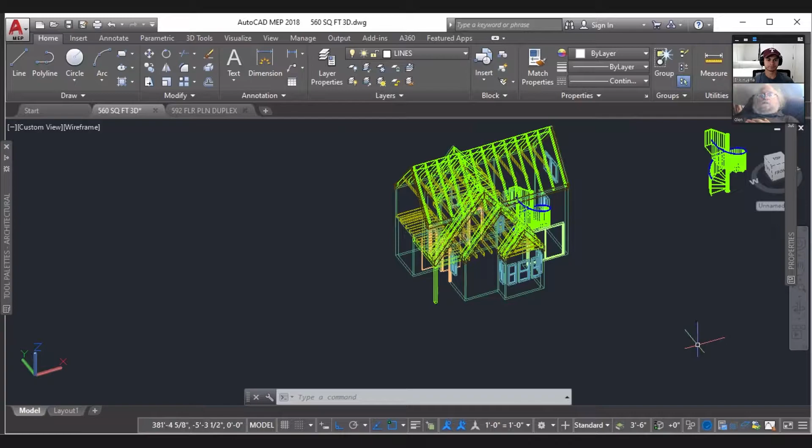Eric, I got some feedback about our tiny house that we were working on the other day, and the only feedback I got was negative, and it was basically saying, "How could anybody live in a place that tiny? Probably couldn't." And so I took their advice, and I decided that our little ladder getting up into the loft area had to go, and I made a spiral stair, and I added a little alcove out here that takes you out to a sliding glass door that lets you out into the side yard, into the backyard here.

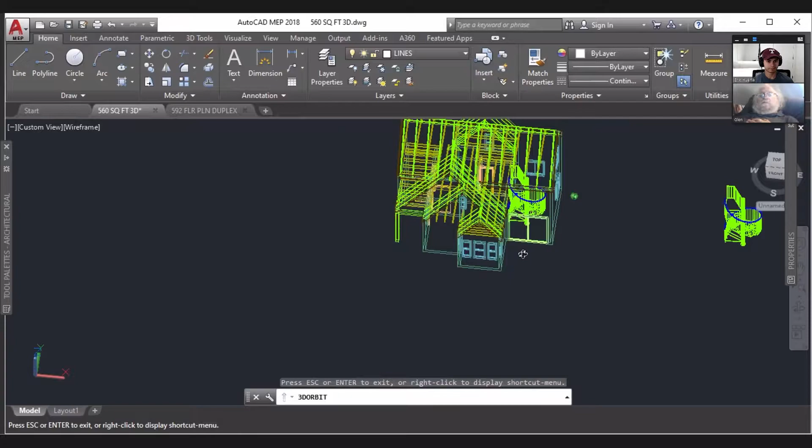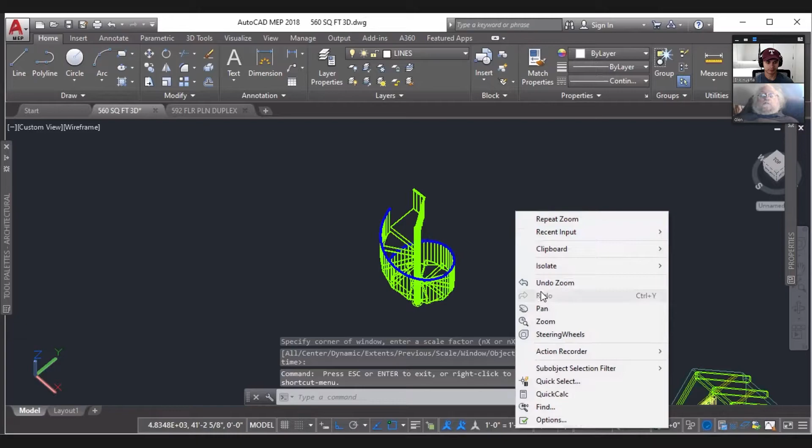And then it's got a spiral staircase that takes you up to an expanded upstairs area. It's not huge. The whole thing is still less than 600 square feet, but as you can see, I've separated the spiral stair here. Let me zoom in here. I also switched it around so it went in the other direction. And the reason for that is that it gives you an option for a little computer desk over here, a little place where you could potentially hang out and have like a little mini office. Still a tiny house, but bigger than it was.

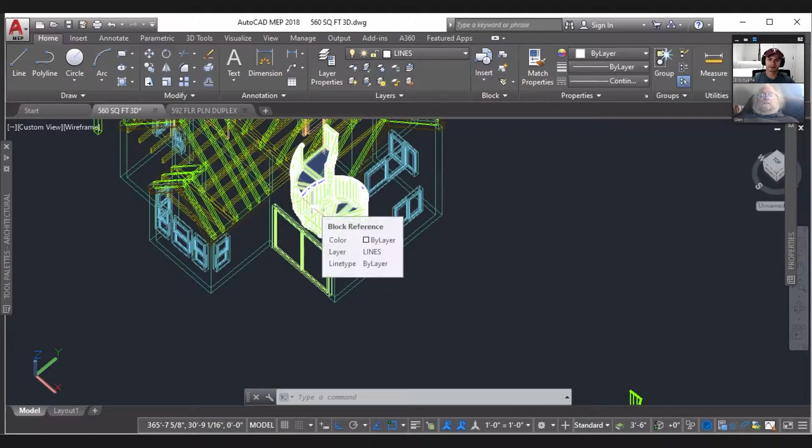Okay, so you basically took the spiral staircase out of the main floor area and gave it its own little section. No, I took the loft ladder out that was over here, and I replaced it with a spiral staircase here. See it? Yeah. Let me share this other screen with you here. There it is. All right.

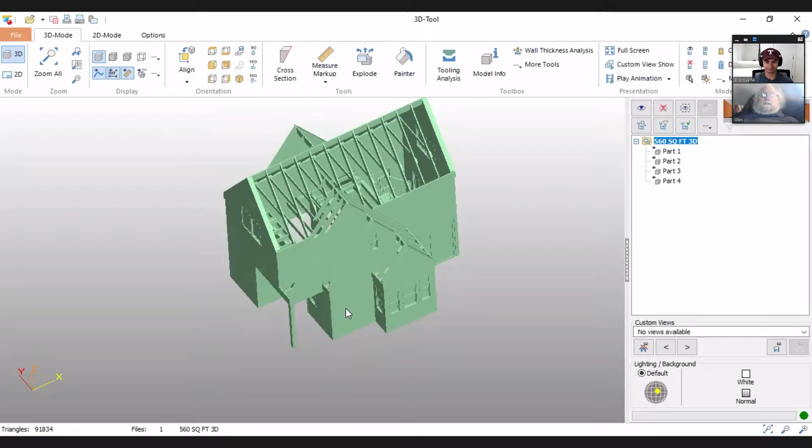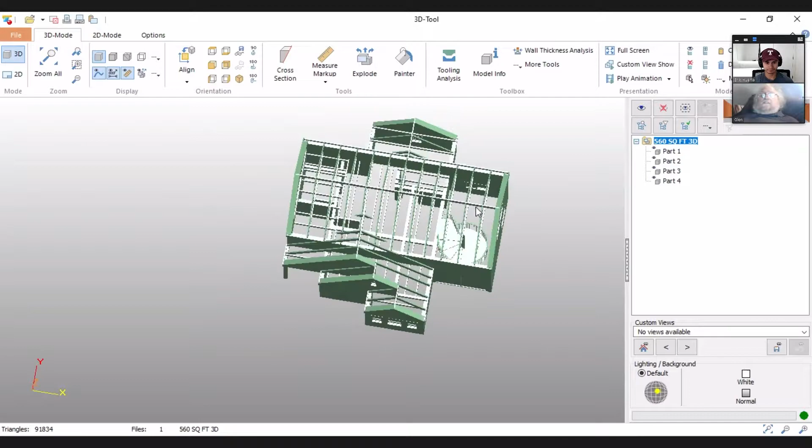Okay, so basically, this is the rendered view of it, and here's your front door, just like it was before, except that it's now got this area expanded a little bit, and instead of that loft ladder, you got a spiral stair. And the spiral stair takes up about half the space of this little expanded alcove here, and it leaves you a little office area in here, someplace where you could put a little computer desk. Anyway, that was in response to the criticisms that we got, and I should pull up this.

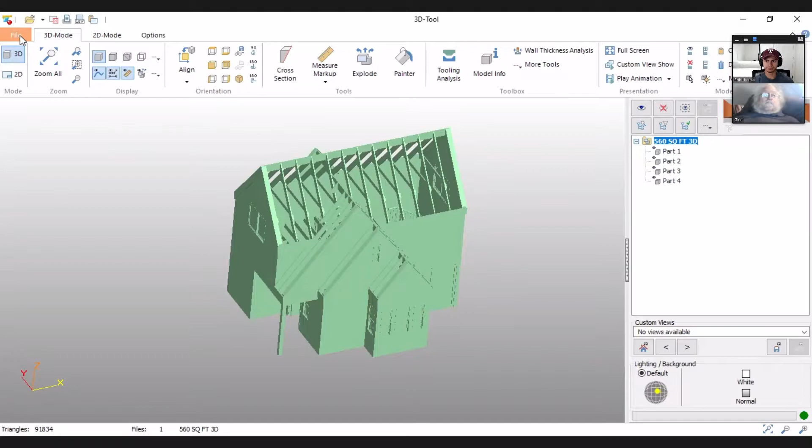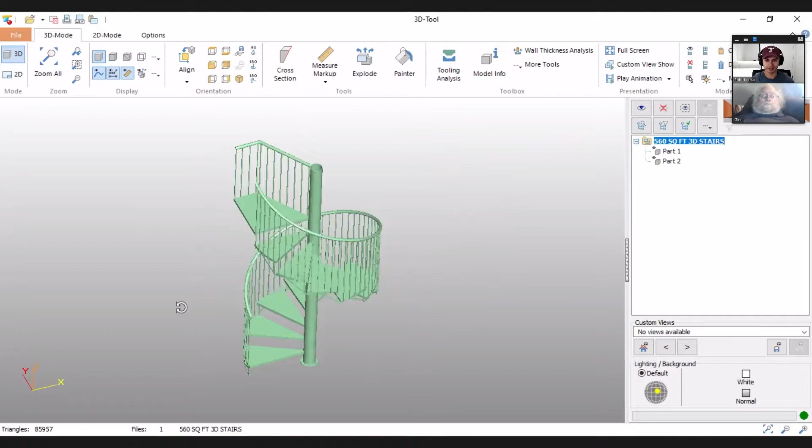And while you're pulling that up, there's options to make larger homes. Obviously, that would increase the cost of production. But a lot of people just use them as little weekend vacation homes to rent out, maybe for 2 to 3 people, only for a few days. So depending on usage would also determine the size. Oh yeah, I mean these things aren't something that a normal person's going to want to live in full time, but for a cabin somewhere. Right.

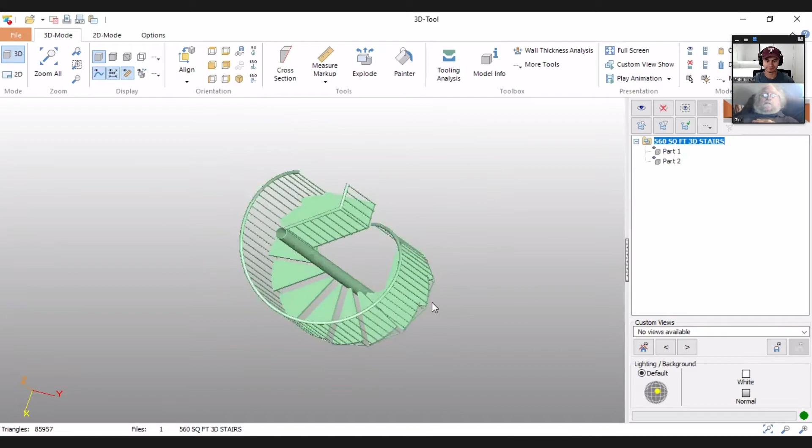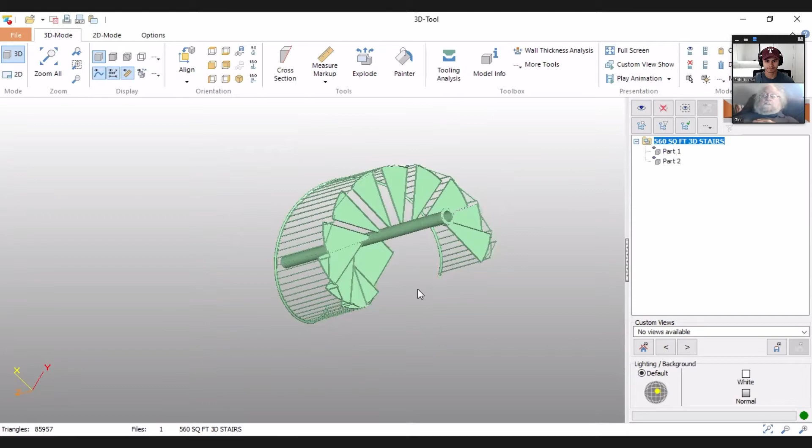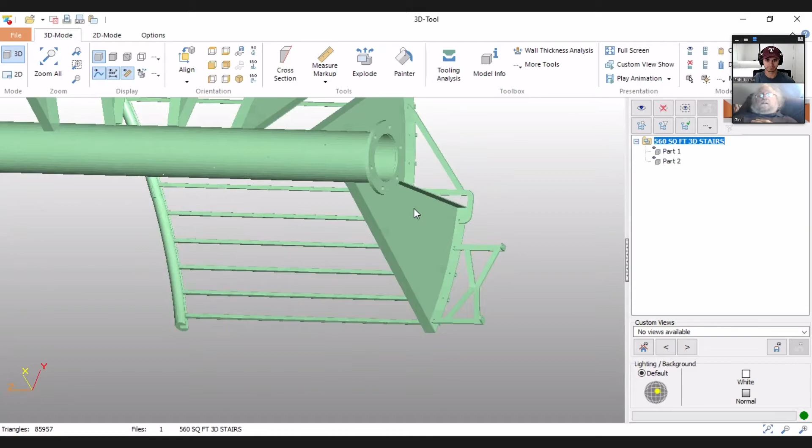Anyway, there's your spiral staircase, and the thing about this is that you can make it yourself. I'm going to zoom in here and show you an upside down view of it, so that you can get an idea of what the thing consists of, and you can 3D print your own handrail. The only difficult part about this stair is the handrail. And if you have your own 3D printer, you can print it. You can see where I started out with a little brace on the bottom that holds the bottom pan. This is just a sheet metal pan that you can make up. And then each one of these pans is connected to the next pan up with a brace here.

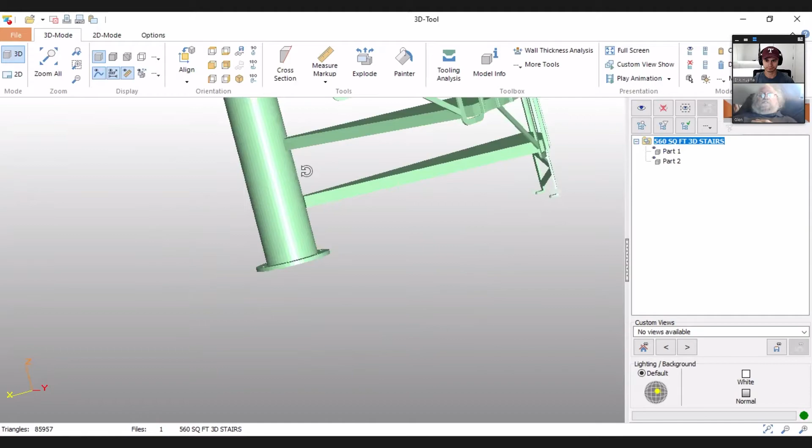And then each of these is done with a segment. It's a pipe segment. And of course, the segments in this case are 8 inches because that's what it took me to get from point A to point B. Let me show you just the single handrail assembly. Okay, this is just the handrail assembly. That's the segment of pipe. See? And then what you have is an external pipe, and that bolts to your pan. And then you have another pipe that slides in the middle, down through the bottom of that, and then you grout the whole thing.

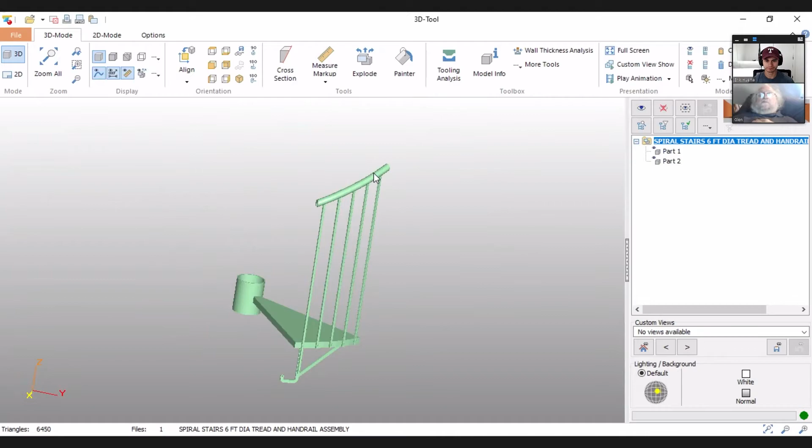And then this handrail had to be 3D printed in 3 different sections. And I gave you those the last time I saw you. Yeah, I have them. I think I'll take some pictures and throw them in here so people could see what we're talking about. I have it right here. I glued. So this is the... Yeah, there you go. There it is. I was able to glue 2 of the sections together, and I left this one separate just so people could see. That was the center. Oh, okay, the little one was the center.

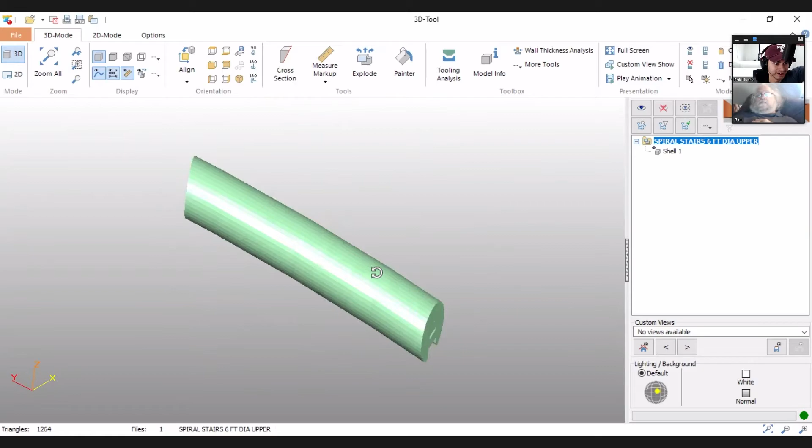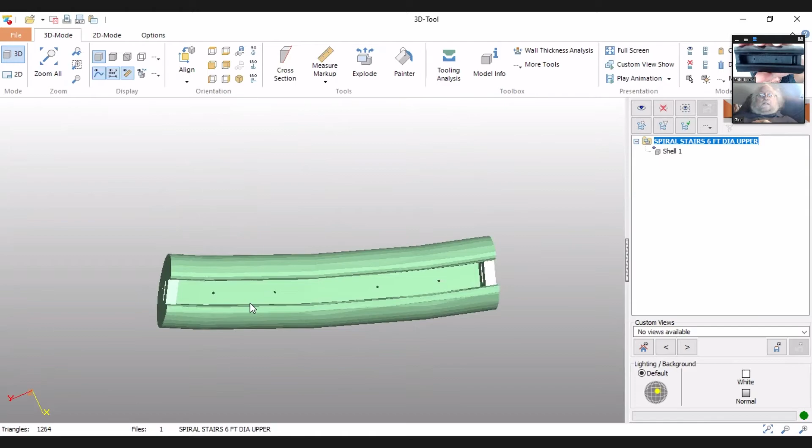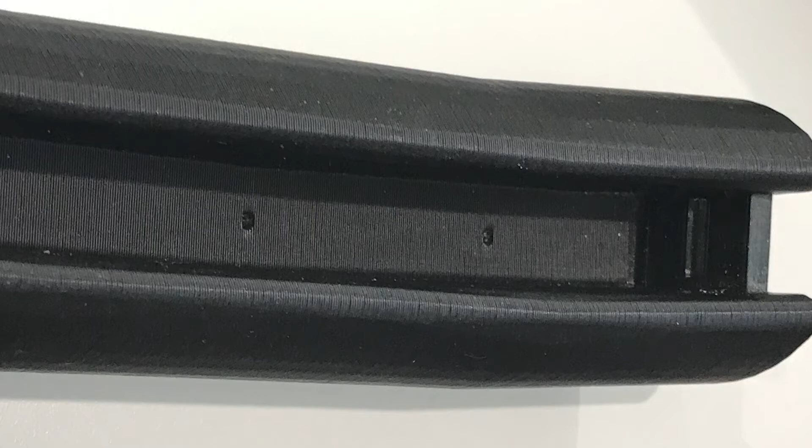Well, I glued them so I could take them apart, but I see that you put some slots in here. Yeah, you see, and then not only that, but there's holes in the bottom of this. Let me zoom in here. You see the holes in the bottom? Right. These holes are 3D printed in place, and they're designed to accept screws, and they're evenly spaced so that your balustrades, the little angle bracket on either side that supports that balustrade, screws right into that. The screw screws right into these holes.

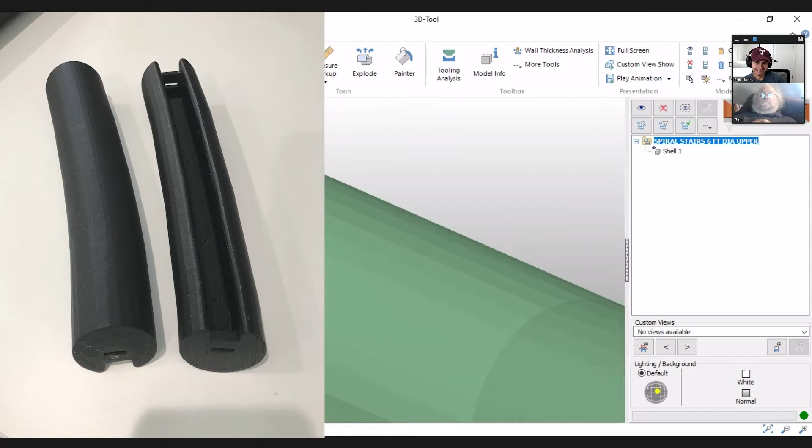So you can download this from our website, and you can make your own handrail for this particular stairwell. In fact, we'll put the whole stair up there. We'll let you download the whole stair for free. Nice. I knew I should have asked about the handrail. I knew I was going to mess it up. Well.

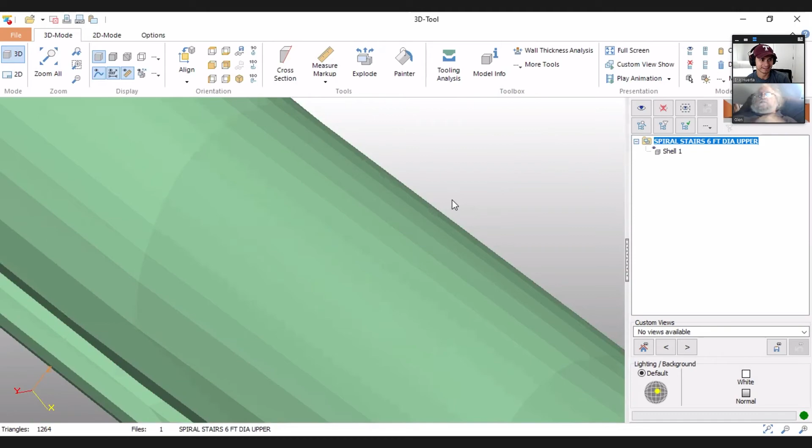Anyway. So how do you use these slots? How do you connect them together? I mean, I used hot glue just for... Yeah, that was just made for a zip tie to hold it together long enough for the glue to set up. Okay. All right, well, we'll throw this up on the site if anyone wants to print them. And then after you print them, are you able to finish them or touch them up with anything? Just out of curiosity. Yeah, you can do whatever you want with it.

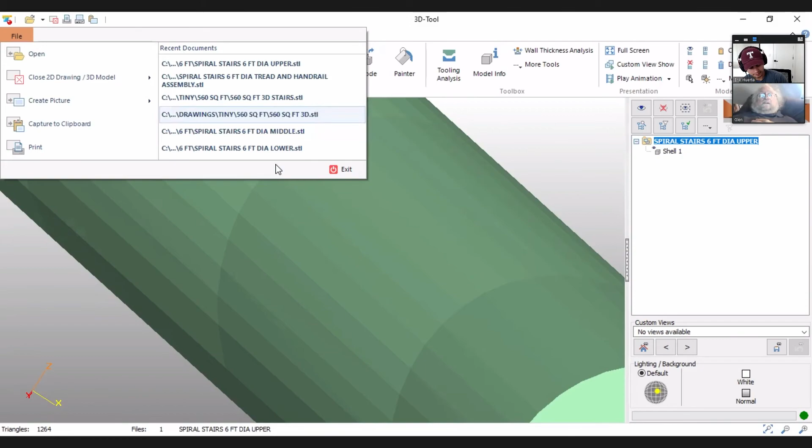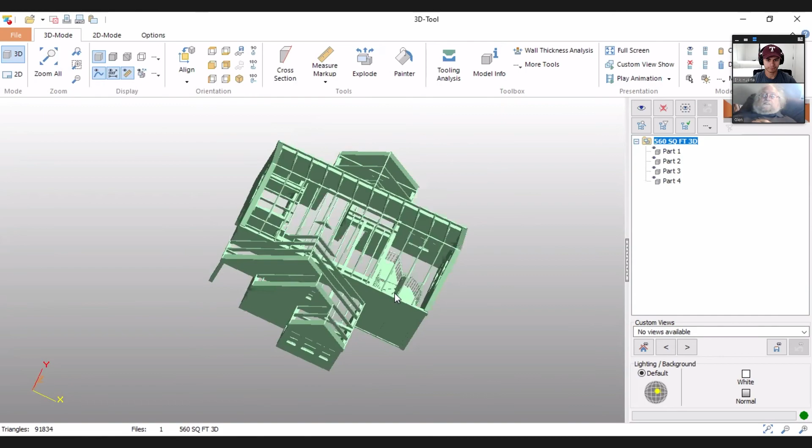I would suggest, you know, you're not going to use it outdoors. If it was outdoors, you'd have a problem with the plastic degradation from the sun. But if you're using it indoors, in a condition like this, it shouldn't be any problem. You can print it any color you want. And you can put textures on it. Do anything you want with it, really, if you want to get creative.